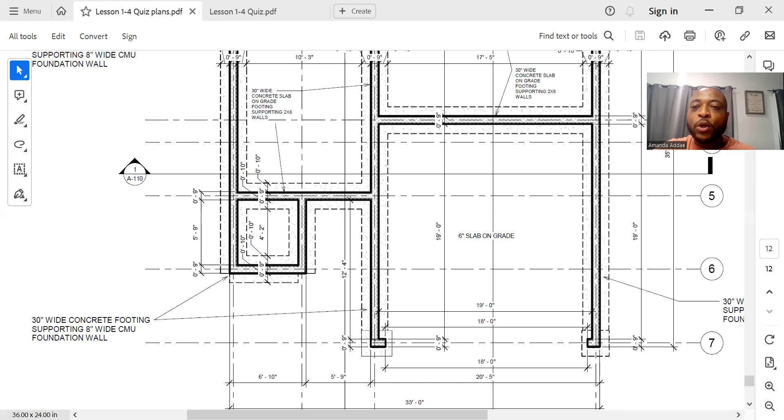All right team, here we go. This is our first quiz in the mentorship program. And I felt it was important to stop at this point just to recap, to make sure that we all understand what we've been learning so far. Not just blazing through lessons, but let's bring it back home and get some questions answered, make sure we all fully understand it before we move forward.

As y'all know, we poured the slab. Eric and Fode did come out there, so I think they got a little bit of an extra visual as to what was going on. And we were actually having to calculate some of it on the spot, on the wall, one of our walls that we were pouring, and the foundation, yeah. So I feel like y'all got a little bit of an advantage, you know what I'm saying? But either way, it still needs to work out. We all need to understand it.

And it is important because as a contractor or a GC, you're going to get to the point where you have people working for you, telling you how much concrete they need or how many truckloads they're going to order, overcharging you because you don't know. It happens. People be ordering materials and using it on other jobs, ordering concrete for your job and pouring the next job. All you get is just a bill saying, this is how much I need. But you need to know at least what to expect, so that you can kind of keep your people honest. It's good for you too, because ahead of time it helps you create a good budget, so you get an idea, okay, we need this much concrete, we know this is the rate it's going for, so we're going to try and see what it costs to do it.

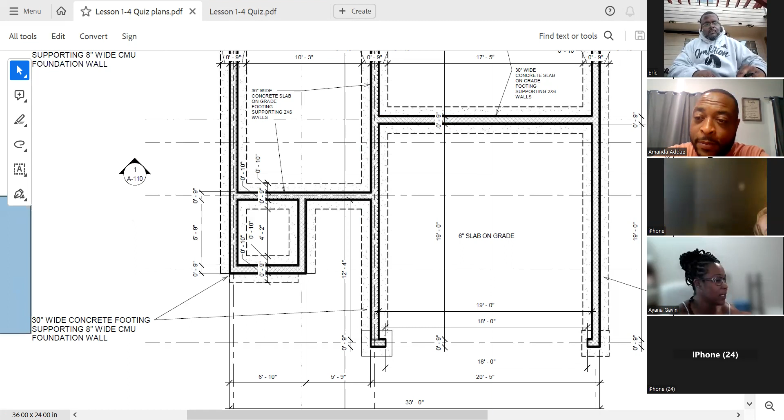So what we have here, let me get to that page. We're gonna go back to the top. So if you don't have it in front of you, understood, if you didn't print it, it's fine. Let's go over it. We'll move this to the side, narrow this out. All right, so we started out with the quiz. Let me get this off of here. And the quiz was based on this, right? I put together some pages, I eliminated some things and I just did 12 pages to kind of get to the point of what we need. So we're gonna get it started.

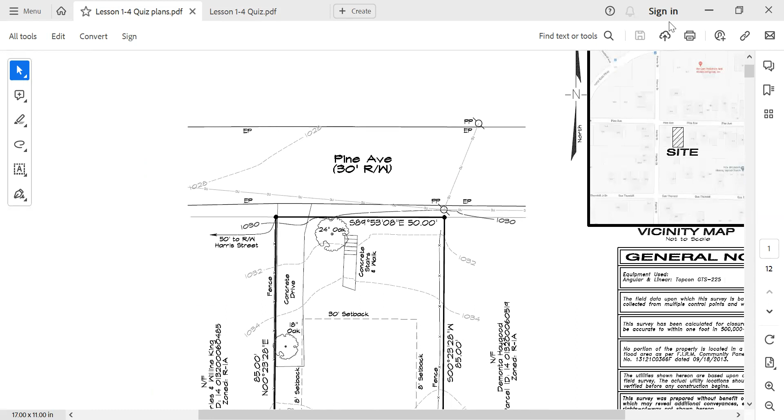The first question was, what is the street elevation? Now, before you answer that, let me get to that page right here. Okay, so we're gonna discuss this. What is the street, what's the number for the street elevation? And I'm gonna start out with the person who came to class late, Ayana. What's the street elevation? It's 1028. It is. It's also 1030.

But don't the 1030 kind of run into the property? Yeah, actually both answers are still correct, because at 1028, going halfway through, it branches. It's like between 1028 and 1030, because the street is sloping down. You got 1030 at the corner right here, and 1030 running through right here. So by the front of the property, you're at 1030. On the street level, you're at 1030, but then you're around 1028 right over here. So 1028, 1030 - if you put that you were 1030, 1028, that is it.

Both answers are correct, that is the street level. This is the street and this is the street. I will lean closer to 1030 as a number to work with. Both are correct, I actually know that both of them are correct when I did that. So that means, basically when we're doing it, we want to base it off of the 1030, the elevation that's closest to the property line. Yeah, I will go that way because that's actually where your sidewalk is, so we'll go closer to the property line.

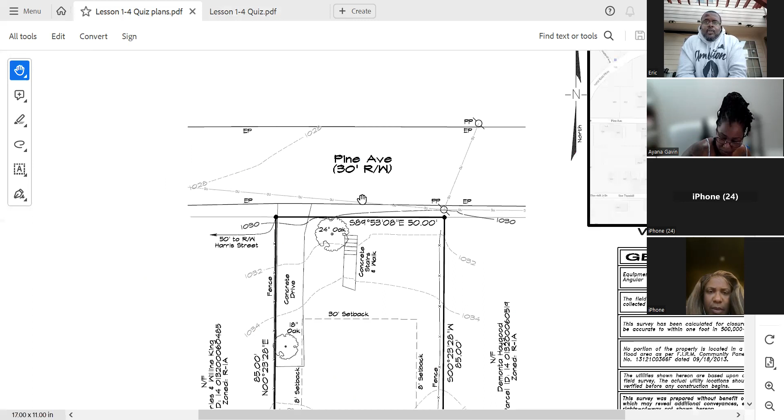So I think that was fairly simple. The second one, what is the rear elevation? That also has two answers. The rear, Eric, what'd you get? The rear has three. Well, actually, let me see. Yeah, it has three. The rear elevation, I got 1037.8, and a 1037.4, and a 1037.2.

Okay, what's the one by the tree? The tree is at 1037.2. Yeah, so we got two different levels, and then in the middle you got the 1037.4. That's not the property line? No, right here, down, the 1037.4 - it's outside of our property, but we could still use it. It just shows the different elevations of the land in the back.

Exactly. So what's the rule of thumb when you're looking at the rear elevation? Well, you want to look at your property first, where your property ends, what the line looks like, you want that. It's also very important to know what's behind you, because this is going to tell us what the difference is here. Like from here to here is not a whole lot, 0.8 and 0.4 is not a big drop. But if this was like 1050, you know what I'm saying, then we're like, okay, we got a nice steep hill or a steep incline behind our property line.

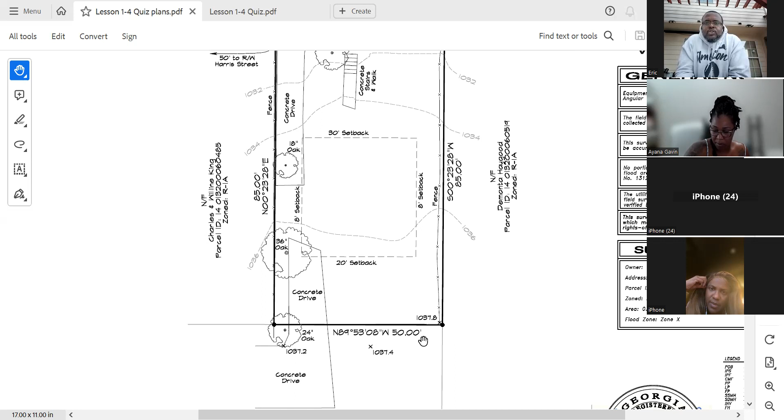Well, it would show you what way water would flow. It will show you which way water will flow. Your site plan actually also discusses that too. But at least, Ayana, what did you get for your rear elevation?

I was thinking what Eric was thinking, because I saw the 3 numbers. That's why I was asking, like, what's the rule of thumb here. I guess that would just let you know if there's a slope or a drop off behind your land.

What did you get? I had got 1036. I was thinking that it stopped around the setback, but now I see that it is 1037. So you had a stopping right about here. I see how you could do that, but definitely we always want to look at what's back here. We want to see what the elevation is at the rear of the property.

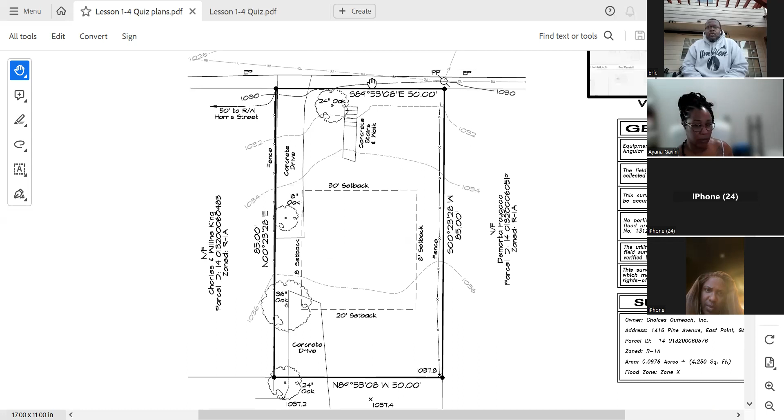Now, given what we're talking about, based on this, I think I asked the question: if you're standing at the street and you're looking at the property, which way is it leaning? Is it higher or lower towards the rear? Eric, what did you say? It's higher at the back? Ayana, you're nodding your head, you agree? Yeah.

Elisa, do you agree? I do agree, because it's 1030 in the front and it's 1037 in the back. So that's a height of 7 in the back. That was gonna be my next question. So you got about a good 6-7 feet. You know what I'm saying? Of a drop.

The interesting thing I'm going to share with y'all about this lot that y'all didn't know, the house plan is a basement house plan. But being that it's sloping, remember I taught you that when a property is leaning, when it's going down, that we can create a basement out of it, remember?

Well, in this particular case, it's going up towards the back. And we use that opportunity to create, it's not a true basement, but like a so-called basement. So basically just 3 levels.

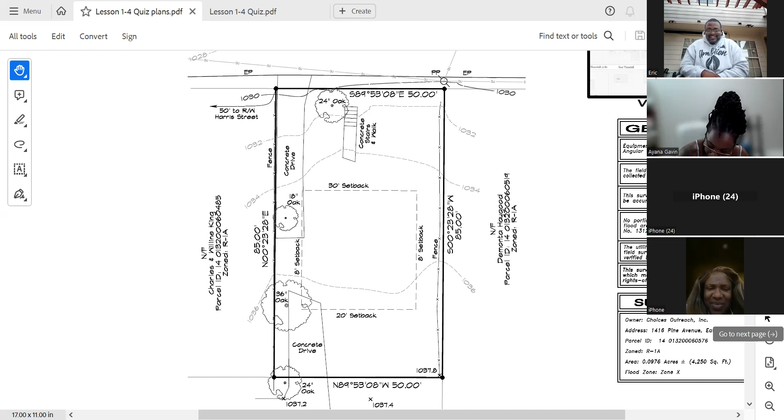Would they call that the reverse basement? Remember somebody said that? A reverse basement? That was a little different. They wanted like a piece on the top. Yeah, I remember that though. Reverse basement, like get out of here. But that's an attic for sure. A reverse basement is an attic.

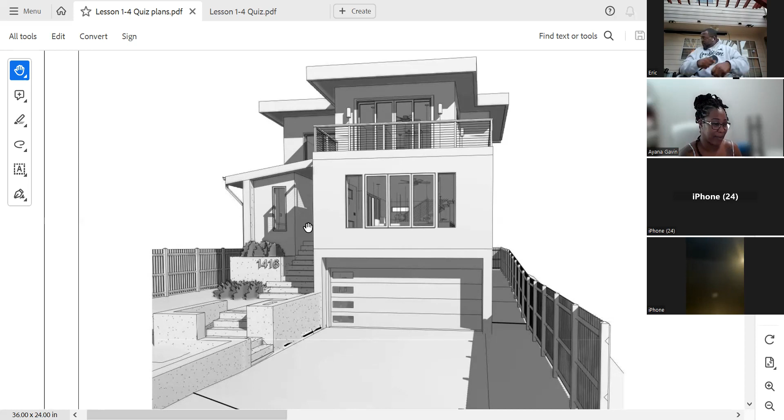So is there another room in there? There is. Yeah, and you'll see it when we go into the floor plan. So basically, we created a so-called basement out of an inclining lot. You know what I'm saying?

For tax purposes, is it listed as a basement or is it still listed as living space? It's living space because it's not fully below grade. Everything on this side, where we cut into the right, is all exposed. And you have windows on the left side around ground level. So it is exposed and it's not a full basement. So it is heated space, considered a part of the house, as opposed to where they'll go in there and try to discount the basement. Correct. That's exactly what I wanted to know.

All right, cool. So that works. That's excellent. So far, so good. Everybody get a check. All right, cool. Now let's get busy. We're through with the first part on the elevations. And then I wanted to get to the setback. So I asked a question: what is the front setback?

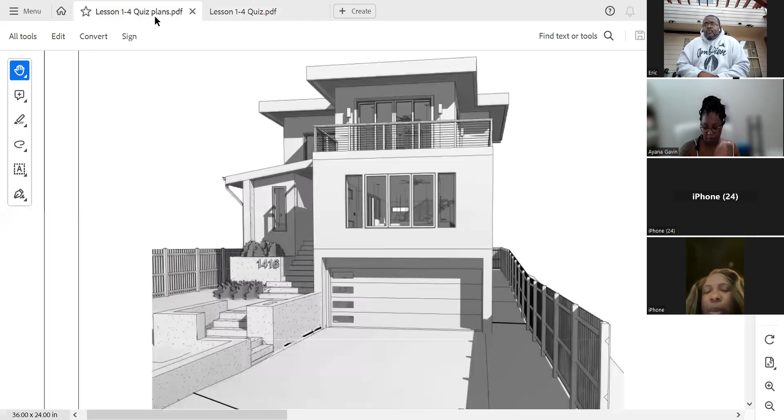30 feet. You sure about that? 30 feet. I'm sure about it, 30 feet. It says 30 feet. All right, let me ask everybody else.

Eric, what you got for the front setback? Wait, hold up, was I supposed to be looking at this on another document that I missed? No, it's on this same document. Yeah, it's 30. Wait, you didn't see it?

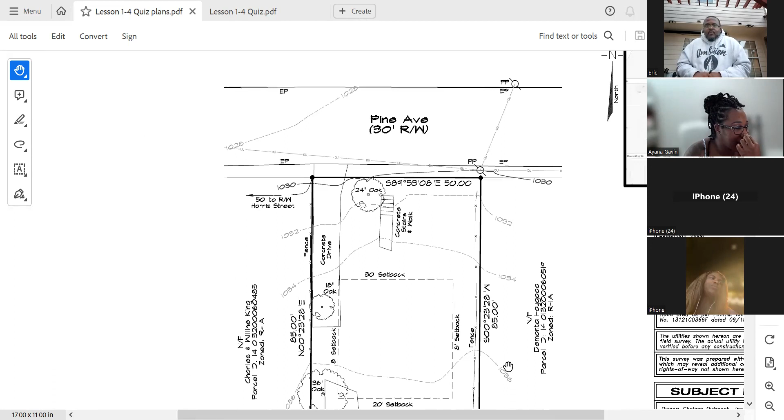And Lisa just said it, she said it says it right there. I was staying present with the present question, I didn't skip ahead. Oh, okay. Cool, so setback, everybody agrees 30.

Yeah, okay, that's unanimous, I like that, Elisa. She was like, it says 30. I should have removed the setback and just left 30. Made it. Okay, so with that said, then obviously we know what the rear setback is.

20. Yeah, 20. Yep, 20. Okay, what about the side setbacks? 8.

Question for all of y'all smart people, because I know y'all know this stuff. This happened on another house I was doing, right around the corner from it. Let's say that my house is going to end up being a little bit wider, and that means I'm going to encroach on this 8-foot setback. I need it to be maybe 6 feet or 7 feet. I can't take 8 feet because I got to put my house on here because maybe my lot is not wide enough. What do I need to do? What's that terminology, what I need to do to be able to get approval to build in this area, to maybe reduce this to like 6 feet?

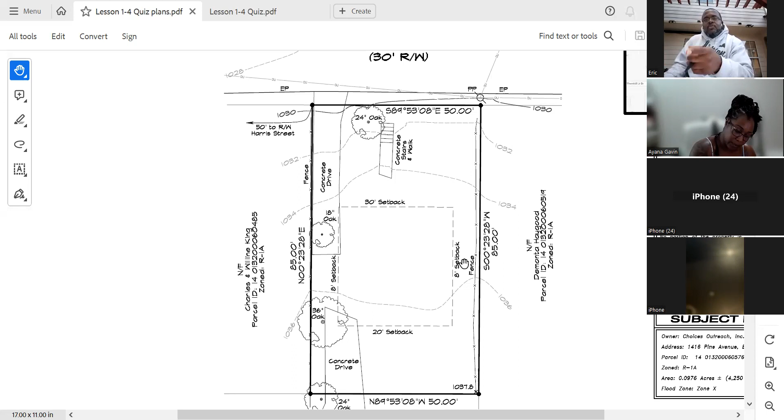That's why I didn't let you answer right away, we did talk about variance before, I just couldn't remember the terminology. We did talk about it before, and then we had to submit it to get approved before we do it, right? Exactly, because if they don't approve you, you can't do it. So you do have to resubmit, you do have to show it on your plans, show that you're asking for whatever, 7 feet, 6 feet, because the house may be wider.

You got a question? Yeah, so would it apply if you're going within the setback or only if you want to go outside of the setback? Only if you go outside of your setback. So if you're within your setback, you're all good, but whenever you go outside of that, you need to have a variance, and it may not get approved.

So there's different factors that may get it approved. In this case, I had the same situation because this same house that we're looking at, I built it on the other lot adjacent to this, and it was like the lot was smaller than this lot. So I had to change the setbacks, and they could have denied me, but it just turns out that the properties across the street were all like smaller and were grandfathered in. So when I made my case, they were like, all right, we'll give it to you, or maybe it was just God, you know what I'm saying? I got blessed for that.

But either way, maybe it was because you had owned the other property as well, so it kind of butted into it. That part.

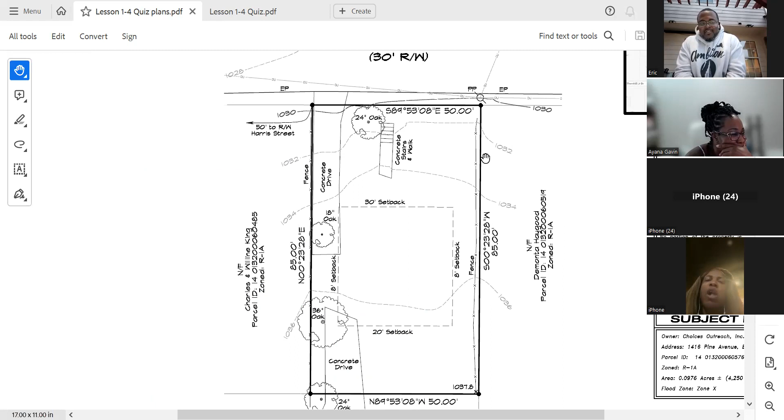Since it ain't so tricky, I'm gonna start with Elisa. How wide is our lot? Okay, let me let her eat. You're muted out, so we can't hear you. I'm sorry, my phone rang. Okay, how wide is our lot?

How wide is your lot? Your lot is, let's see, across - I'm looking for the number to show it. It's on there. 50. You say 50, all right, let me...

Oh no, let me add it up. 8 plus 30 plus 8. Is that right? 8 plus 30 plus 8. Why do you want to take me back to geometry class? Yeah, what does that give you? 8, okay, 16 plus 30. That's 46.

Is that your final answer? 8 plus 8 plus 30, that's 46. That's your final answer? Yes.

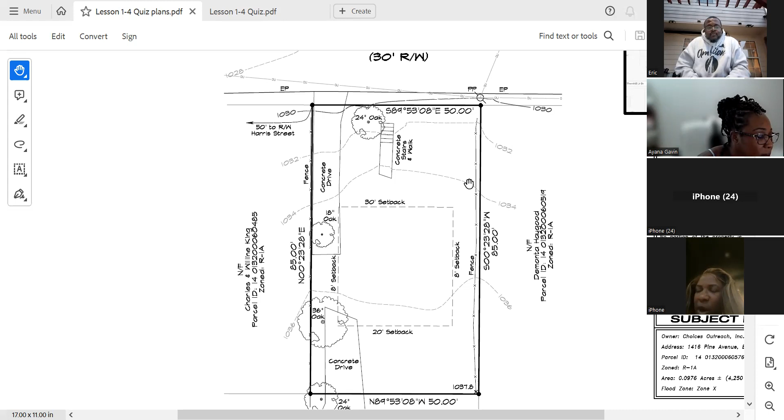Yes, okay. Ayana, what's the width size of the lot? I don't know, I think it's 50. Okay, Ayana said 50. Alicia said 46. Eric, I don't know, I got 50. You got 50 there. What do you have? I got 50, but I didn't know if you were supposed to add the 85.

All right, so that's the first part - that's how wide the lot is, right? And we're gonna discuss it. In the other plan it shows what the width is, but this one just kind of shows south - it's like the direction. Thank you. And I'm glad I sent you something different, because you have to be able to see the different ways things are written, but ultimately the answer is the same.

Elisa, I commend you on getting real slick with it and trying to come up with that number, the mathematical wizardry you try to put on us. But that didn't work, the answer is wrong. Well, I didn't know if it was the 50, because it says S89 degrees. That's the latitude or whatever.

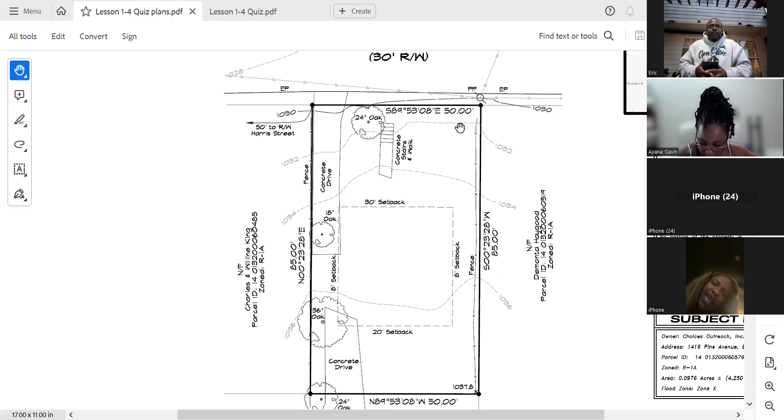Let's talk about that - it says 50 feet at the top across. Exactly, and 85 on the side. Exactly. So before, in the classes we taught, we discussed that - I said don't pay too much attention to this part, because we're talking about 89 degrees, 53 minutes, 8 seconds. That's what these are right here.

Metes and bounds - it's your metes and bounds, it's your GPS. If you want to really locate a property, you want to see what degrees it is, is it east, is it west? So over here we're running 89 degrees, 53 minutes, 8 seconds east. Disregard all that - what matters is the feet that come after. So it's 50 feet. Okay, so y'all correct, it's 50 feet, and that's what we're looking at right here.

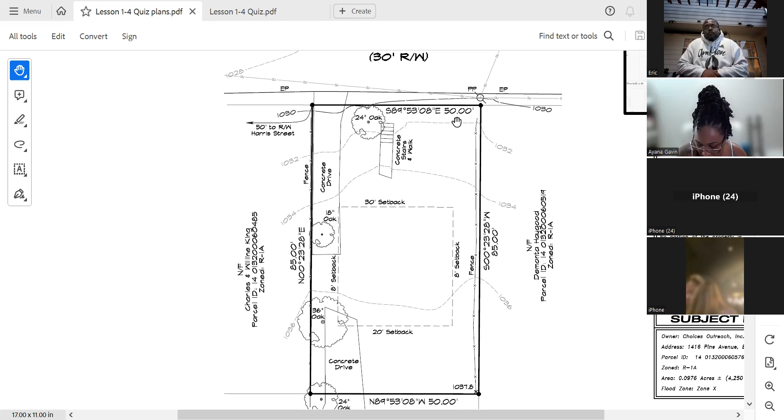With that said, then you know how long or how deep our lot is. Eric, what you got? 85. 85. Ayana, what you get? 85, because it's right there. Elisa, what you got?

85. It's right there. Fode, I know you got it. Yeah, 85. Okay, so that was it. I thought that might be a little tricky for you. Eric was like, no it's not. But see, it was a little bit, because all these confusing numbers are kind of big numbers, you know what I'm saying? So, all right.

So we know how long our lot is, we know how wide our lot is. And so I asked a question: based on the length and width of the lot, what is the maximum width and maximum length of a house that we can build? So this is our buildable area, right? This is our lot, and this is our setback: 30 feet, 20 feet, 8 feet. So it gives us this little box right here. So based on this, how wide of a house?

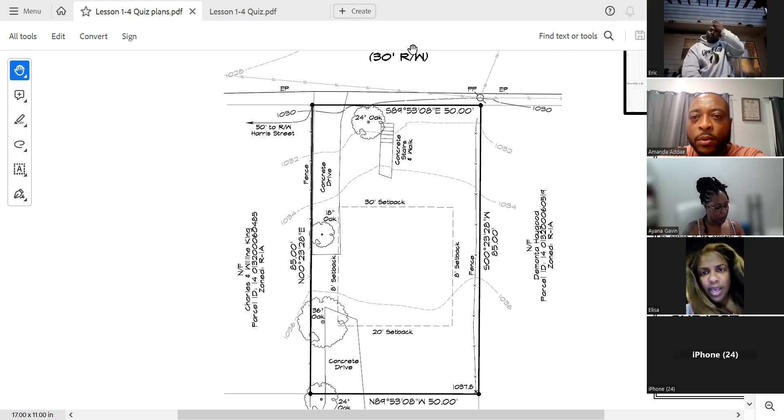So what I was asking was the next question. We know what our width is for the lot, we know what our length or how deep our lot is, we know our setbacks: 30, 20, 8. So we know this is our buildable area. We discussed this before, but this tells us one thing: when we go to look for our plans, now comes your wizardry, Elisa. When you come to this portion, how wide of a house can we put on there? And then how long or how deep of a house can we put on there? Not saying that's what we're gonna do, but what are we able to do?

I thought that might take a little bit, but I think y'all should be able to handle that, so I'm curious to get y'all answers. I'm gonna ask y'all each, and then we're gonna break down how we got it. Not sure if y'all got this far. Eric, you got this far? It's 34. Okay, Elisa says 34.

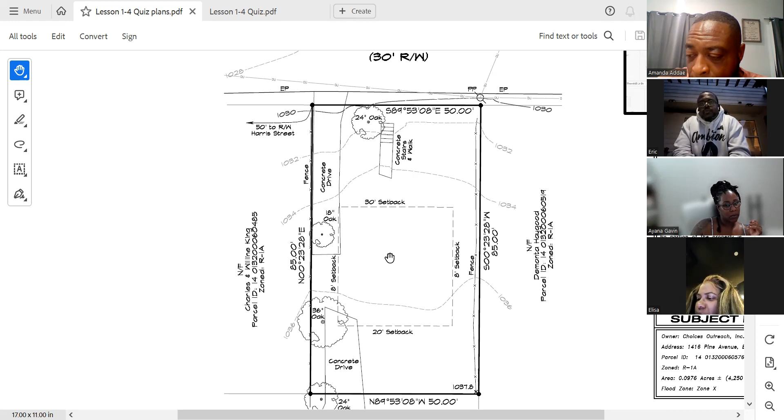Eric, what'd you say? I got 34 wide, and we're just doing the width. Okay. I had a phone call coming, I couldn't hear you. No doubt, I got 34. Okay, so both you and Elisa got 34. Fode, what'd you get? I got 34. Okay, so Ayana? I don't know, because if the front is 30 and the back is 20, I don't know where they got 34.

All right, so we're gonna break it down right now. Does anybody want to break it down how they got the 34? I can break it down: 8 plus 8 is 16, and 16 minus 50... I mean 50 minus 16.

Okay, so what? You see what happened there, right? You take the 50 and... go ahead, Eric. You take the 50 and you subtract the two setbacks on the side to get the width. You see that now? Right, there we go. Thank you.

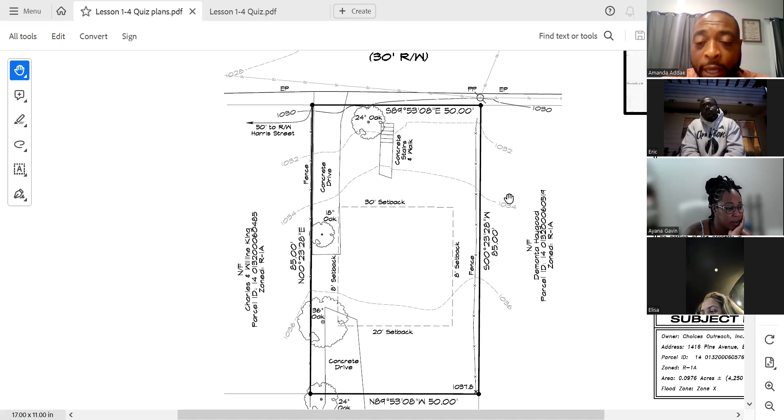So based on that logic, Ayana, I gotta ask you: how long of a house can we put, based on what Eric was just saying? If we're taking the 50, subtracting the side setbacks, going the opposite way, we're gonna take this number and subtract what? So would it be the back setback and the front? Yeah. Ooh, that's a little house. You gotta get a variance then. So what is that, like 35? Yep.

Exactly. So, in knowing this, just so y'all know, that was one of the challenges that occurred when this plan was being designed and chosen. The original plan was bigger, and it wasn't going to work. So they had to go back and redo it, and it was pretty tight. Like we were right there.

So all that makes a difference when you're going to build. You're like, oh, the lot is good enough, I should be able to put this there. After you go through your setbacks and you see what you can put there, you're realizing, yo, I can only do a 34 by 35 house, and you're restricted to that. If you want something outside of that, you got to get a variance. Okay, all right, good job, that was pretty good.

And so your house was this small? Yeah, but it's 3 levels too. So you had to build up. Exactly. If it was a ranch, it had been long — it couldn't have been a ranch. If it was a ranch, it ain't happening. College student, 2-bedroom condo, you know what I'm saying, New York apartment. Right, all right. And still costs a lot of bread. You're gonna pay.

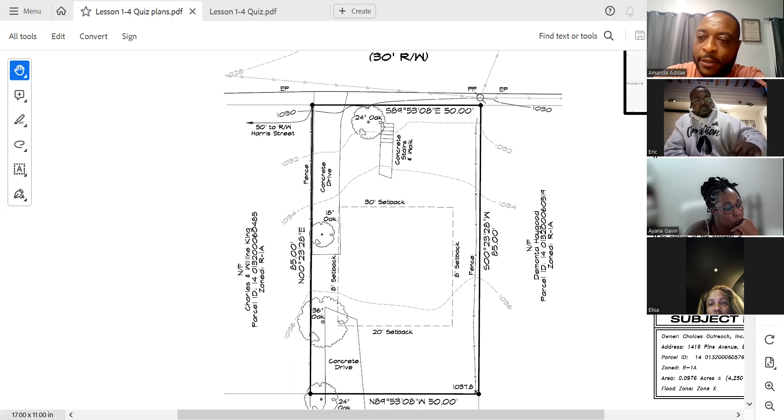All right, so then we went to the survey. I went to the next question. Went to the survey, let me see here. I kind of jumped ahead of this a little bit. But on the survey, I asked a question. On the legend, on the survey, if I use a tape measure and measure 3 inches, how many feet would that be?

Elisa, got any idea? No—I said if you use a tape measure and go 3 feet where, on the driveway? No, I said according to the legend on the map on the survey. Just based on the legend on the survey, if I used a tape measure and measured 3 inches, how many feet would that be? Where's your legend?

Oh, 1 inch is 20 feet. So 3 inches will be? Yeah, 3 inches would be 60 feet. There you go, we all agree? Yes sir, all right. So I threw that out there to see if I could trip you up a little bit.

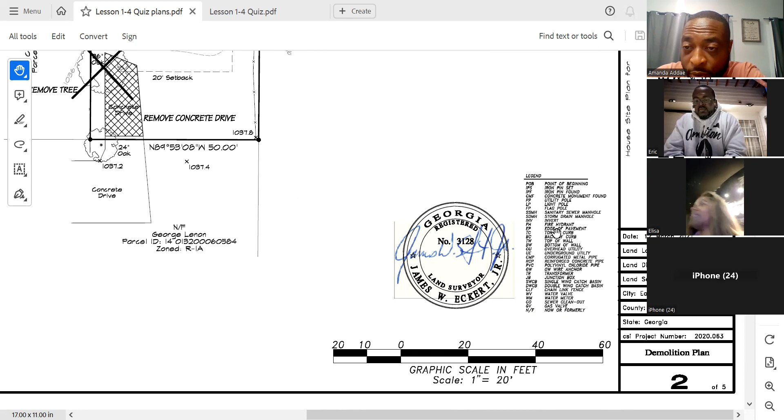Very good. Okay, now another thing, based on the legend again on the survey plan, what does SSMH mean? I'm giving you that one. Sanitary sewer manhole. Eric, I know you see that. Yep. Ayana, do you agree with that? Did I lose her? No, she gave you a thumbs up. Okay, I agree. The only person left will be Elisa, because I don't think she was looking at this.

I think she's ordering filet mignon right now and some wine. So basically she wants you to hurry up and get through it so she can enjoy, get her grub on. We know how you about to get to all that, but you can't do that while we're on here with you.

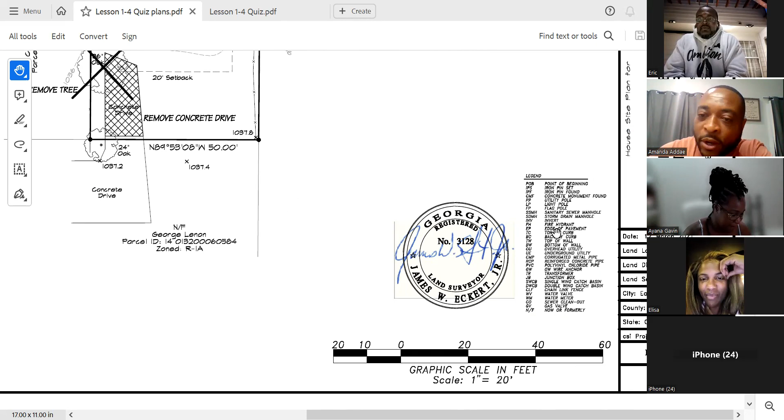So we get it. Okay, so we said that on the survey, on the legend, you saw that, right Elisa? Okay, so then I asked the trick question to see if y'all could figure that out. If SSMH means sanitary sewer manhole, then what does SMH mean?

All right, that one is not on the legend. SMH. It's not on the legend, but would it be a guess—sewer manhole? Okay, you said sewer manhole. Eric, you bring up a good point, it's not on the legend. You're right. Fode, did you come up with anything for that?

No. All right, Elisa, can you take a stab at it? No, because I'd be making something up. The only thing I can think is manhole, monuments, metal. All of y'all are right—actually the answer is 'shaking my head.' Y'all be thinking too hard. Yeah, so if it's not on the legend, it doesn't exist. That's a great point, great observation by all of y'all.

I like it, all right. And I mentioned also, what did you notice that's existing on the survey? We kind of touched on some of that. This is exactly what it was—this was the exact survey we received. So we all got this survey of this lot we're about to build on. What are we noticing here?

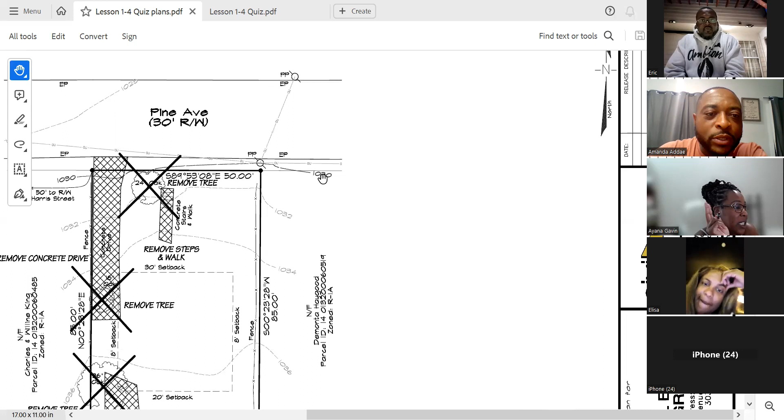Remove 3 trees—trees and concrete. We see trees, we see concrete. There's 2... why is it 2? I just see the survey of the raw, unconstructed land. So on the original lot, a house used to be there, and that house was torn down.

So when we got to the lot, all that was there was this. We have the concrete walk, which all of y'all said there's concrete there. We have the trees that were there, and the driveway that was existing from before. There was some concrete at the rear also. So y'all kept the concrete in the front? No, we took everything out.

Yeah, we took everything out. The reason there was this here is because the lot at the back, which I'm building on, was nothing but a concrete slab that kind of veered into here. So that slab was like on this property.

So without even being there to see it, once you saw this, you realize we're dealing with a lot that has these things on it. So that's going to factor into our cost now, because when we go to do this work, we're going to have to tear this stuff out, since it's clearly in our buildable area, right here on this section. But when you see the building plan as to what we're going to do, you can see that our driveway is going to be in a different location, just based on the plans I showed you earlier.

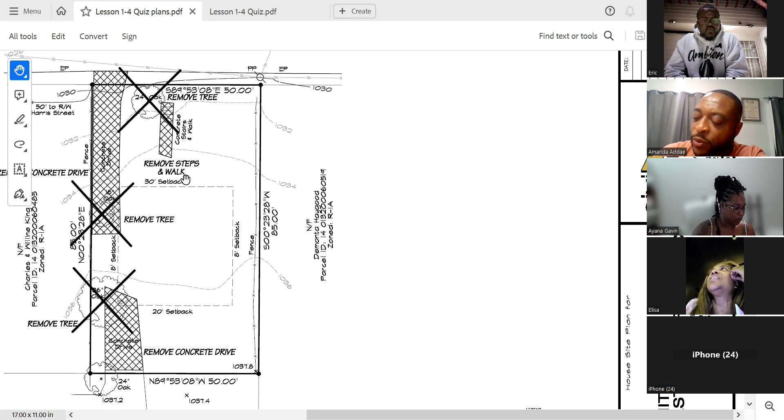Now the quick question I had is, what is the main difference between a survey and a site plan? The construction entrance.

Okay, that's one thing we can talk about. Fode, what do you think the difference between a site plan and a survey is? I say the site plan is done by an architect, and the survey is done by an engineer. Okay, so both are done by an engineer, but it shows you the layout of the house though.

Which one, the survey or the site plan? No, she's asking which one shows the layout of the house you want to build. The site plan shows you the layout of the house, the architectural layout. Okay, so this will be the survey, right? Yeah, this will be the site plan.

So I was asking for one main thing that differentiates the site plan and the survey. Eric, you mentioned that it shows the construction entrance, like our driveways and things like that. Fode, you said it's done by an engineer. So both have to be done by an engineer because they have to be stamped, since that engineer is putting their license on the line to say this is correct. They're certifying this.

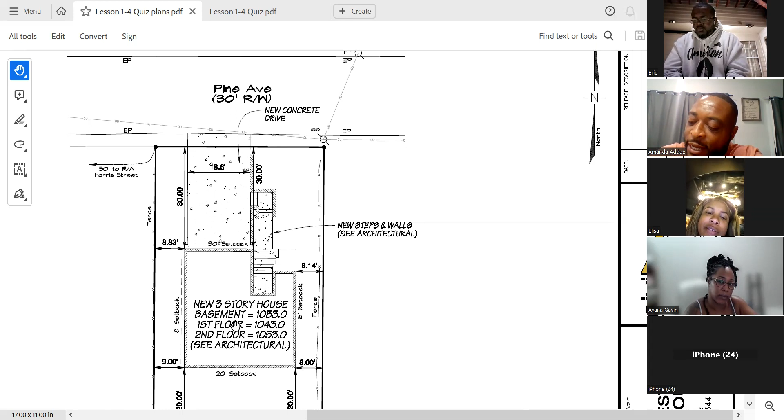Since we know what page the site plan starts on, I had a question about the silt fence. I said, how deep does the silt fence need to be below the ground level? My thing was kind of blurry, but I think you said 5 inches. You got what? Say 5 inches. 6 inches, but 8 inches to be safe, yeah.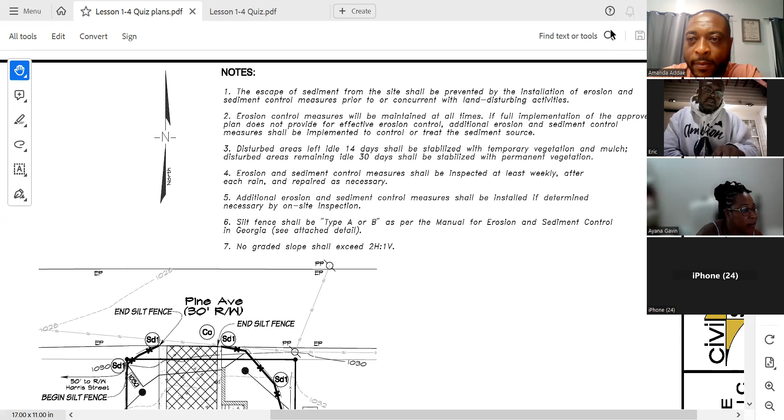Okay, yeah, but it shows you on here—it says, I believe that's a 5. So nah, it says max 6 and then 5. You see this right here? Silt fence type A and B, see right here? Yeah, you see that? That's our 6 inches. All right, okay, I was on the wrong page then. I was on the detail page 5. Let's go to page—yeah, this is page 5. This is the detail page for the silt fence.

Okay, what's the front view? You see down on the bottom? Go down, scroll down, scroll down. I got that number right there—it says 5. Which one? This? Yeah, it says 5, right? No, that's a 6. It's a 6. That's a 6. Mm-hmm. Okay, it looked like a 5.

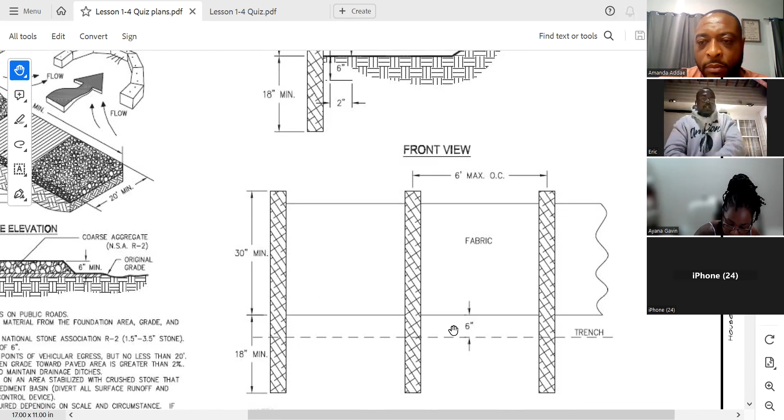And for the record too, so we know, the code is it has to be minimum 6 inches for the silt fence, and it has to be buried in the ground. And then both sides you have to push dirt, so you got to dig the trench on top of it—you got to dig the trench at least 6 inches minimum. And there's some inspectors who are going to inspect that. We had that done at Lake Vista Circle—the inspector came out and actually measured it. So there were some areas that the guys that did the silt fence, I think they had hit rock or something, but they didn't go as deep. So it makes sense, you need to bury it like that because when all the rain came, some of the silt got up under there and came out. So that's when the inspector had a problem, and then we have to go fix it. So really, if you do dig it, if you could get 8 inches, great, but if you can get 6, bury it well and then cover it back up, then you're pretty stable, so that when the rain comes and more silt comes, you're protected. All right, so that's where it's at.

Cool, we got that cleared up. And then, here's a question that wasn't on here—sort of. I mentioned, how do we prepare our construction exit? What materials do we use? Do y'all know? Crushed rock. Okay, so we got 1.5 to 3.5 inch stones.

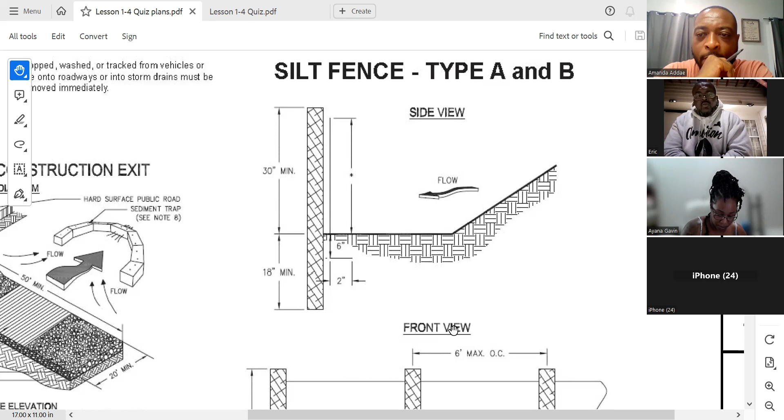NSA R2. So what goes down first? Let's say we got raw dirt. And then we're coming to put our construction exit in. So on our raw dirt, what's the first thing that's gonna go on top of the dirt?

Hold on one second, let me see here. Elisa, are you in position to answer that question? What goes on top of the raw dirt for our construction exit, on our lot, when we're preparing that lot for the construction exit?

I'll call it my construction entrance. We have the raw dirt. You have to put a border line to build on the land, you have to put that six foot... the gravel? No, before the gravel, the plastic liner.

Are we all on one big... Yes, so Eric, you said it, the plastic liner, right? You put the plastic liner on the whole lot? No, you put it under it, on the grade level, and then you put the rock on top.

So we have our construction exit, we had it on our videos too. So let's say we come to the lot, we're about to get started. We have to create a construction exit, and in order to do that, we have the raw dirt. Let's say we graded the land, so all we have is just the raw dirt now.

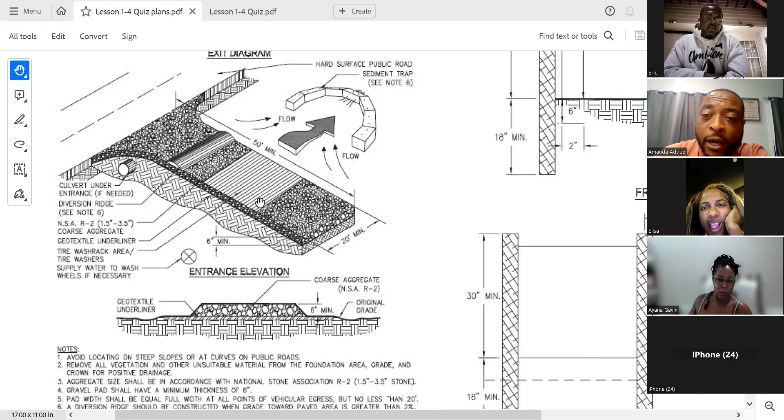So okay Eric, you got that? Fode, you got that too? Ayana, you good? Yeah, and I think Elisa is good too, since she was asking, you're good on that, that the fabric goes over the dirt and the rock goes on top of it. All right, cool. Is that the whole buildable area you do that for? No, that's just for the entrance and exit. Yeah, so you don't track all that mud into the street because you can get fined for that.

All right, we're on the next to last page. Building plan, let's make it easy. So on the building plan, where we go, I asked a simple question on that. Here's the house, here's the house. And then on our building plan, let me go here.

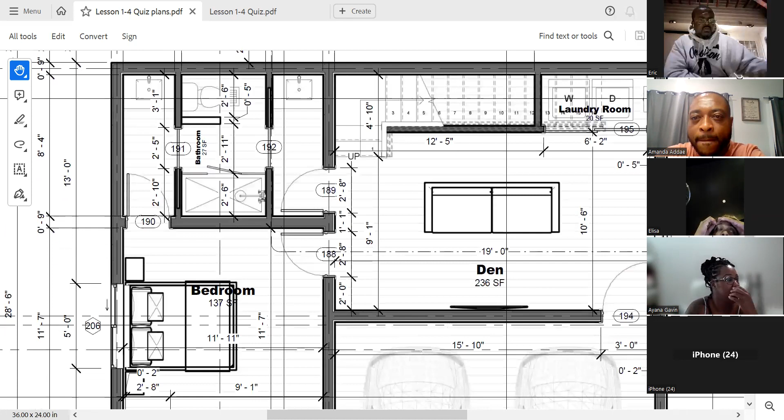Ayana, quick point for you. You were asking that question about, is it just a garage there? If you look at this, it's not just a garage. We dug out the garage area, right? We came in, we dug out the garage area. We dug out behind it, that's a den. And we dug out this area, which is a bedroom, and then the bathroom behind it. So all that was dug out.

Oh, and you put the wash machine, the laundry room down there too. Yep, all that's here, then the step takes you up. So we got windows here. This is the existing level, and everything from this point on throughout, we dug it all out and hauled the dirt out.

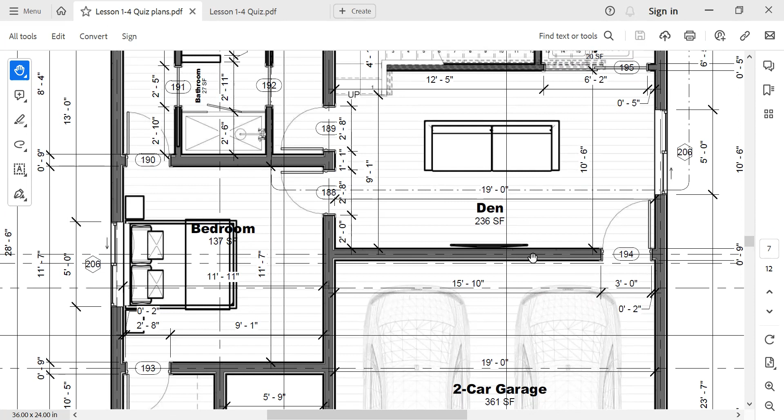Is there another exit besides the garage? There is, it's right here. So there's an exit right here, there's a window and then there's a door as well. It doesn't show you here, but there is. This just shows like a window, but there's a door actually right here, and then there's one window here.

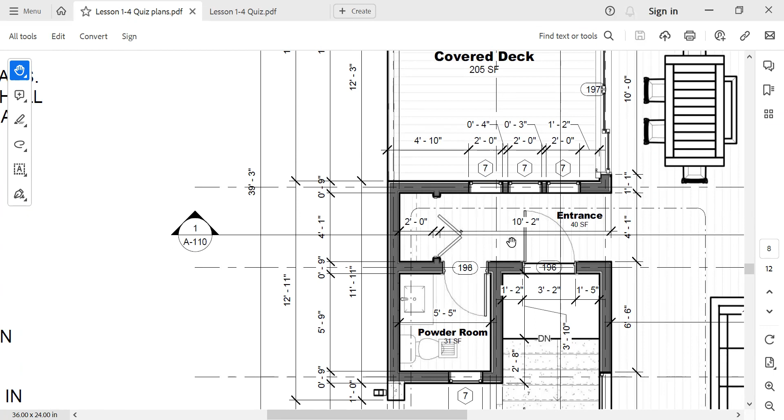So the question I asked, see if we can get that, and y'all should get this easily. I said in the powder room, right here on the first floor in the powder room, is that a right hand or a left hand door? Right here. Now Fode, I'm gonna ask you first. Is that a right hand or a left hand door? I think it's a right hand. Okay, Fode says right hand.

Elisa, what do you say? Left. Elisa says left hand. Eric, what'd you say? I got left hand. You got left hand. Hmm. Ayana, what you got? I don't know my left from my right. Okay.

All right, friend. Yeah, okay, so well, let's see.

I'm gonna ask the two people who got it right, Eric and Elisa. Elisa, can you tell us what makes it a left-hand door? Where the doorknob is and where the door swings. And it's a left hand, and it swings which way? Left. It swings left, inside. Thank you.

Okay, so when it goes inside, is that always going to be considered left? It depends which direction it's swinging. Oh, so just imagine if the doorknob is there. If it was on the opposite side, the door would swing open. It would hit the sink though. Right.

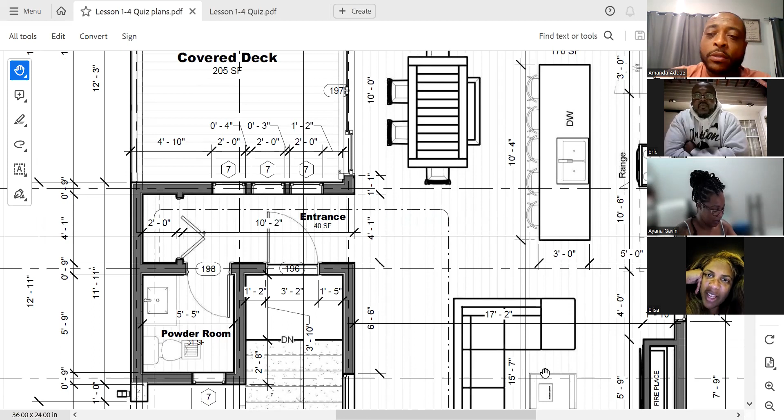Yeah, but also another way to tell is walking in the entrance. If you're facing the door, which way the door is pointed. And the one you naturally would use, which arm would you naturally use to open the door? It would be your left hand. Right, so when you're looking at this plan, Fode, you're getting that? Yeah, you were looking at it from the other way, huh?

I was looking like I was standing in front of it, and then I see it's the left hand. Okay, so remember this always, and I always try to bring this in when we talked about it before. Your doors, and Ayana, you asked the question, does a door always swing inward?

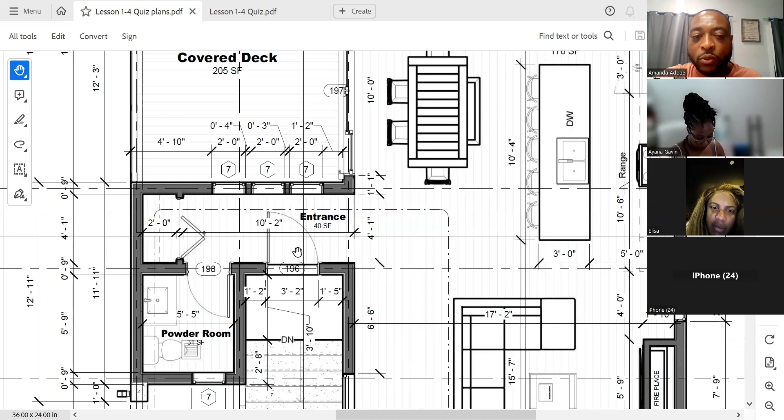And I said, in some special cases, you could make a door swing out. But for the most part, anytime you look at your diagram, it's going to be from an in-swing perspective. When you look at the doors and they have a left hand or right hand, it's always in-swing. So like this front door right here, if you're standing in front of the door, it's swinging this way. So this will also be a left hand.

So as Elisa was saying, you stand in front of the door. You have a right-hand example in the garage. Right, if I go to that, then you'll see. So look at this here.

And it's easy to confuse. I can see what you're coming from too, Fode, but the whole thing is, I wouldn't even approach it like I'm coming from the hallway. I'm going to approach it from which direction it's swinging. So whenever you look at the plan, just go look at the door and say, okay, it's swinging this way, because it shows you the loop of which way it's going, swinging this way.

So as Elisa was saying, stand in front of the door, position yourself in front of the door, and then your left hand is going to be the closest to this door. And then you're going to open it and swing it in. So this is considered left hand in-swing.

So if you don't have a plan like this and you're walking through the house making a list of doors, you have to consider that you're going to stand in front of the door, see that it's going to swing inside, and then determine if it's going to be left or right hand in-swing. We had to do that sometimes. We had to frame in the door, and we got to figure out whether it's going to be left hand or right hand. Another thing I didn't tell y'all, but y'all would notice when y'all go through the house after we frame: you can never let a door swing into an electrical switch.

Not so much an outlet, but a switch. Why? Well, it's against code, number one, but also two, when you open that door, you have to be able to access the switch. Imagine if the switch is, let's look at this powder room, imagine if your switch is here behind that door. When you open that door into the switch, how are you going to access it?

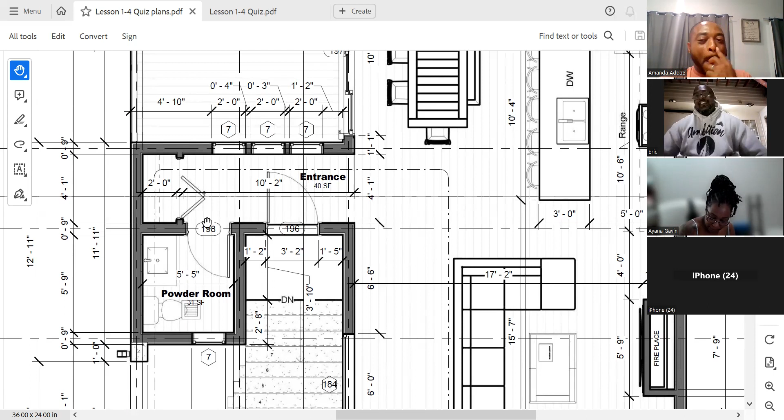Technology is going to change everything, I know. Alexa, turn on the lights. No doubt, the codes are going out the door now. We're going to throw the codes out.

So basically, when you open the door, you have to be able to reach the switch and turn on the lights. So when the electrician walks through the house with you before or after your doors are installed, they have to know which way your door is going to swing. That way they know where to put their outlets and switches. They always put the switch opposite from where the door opens into. If it's a left hand door, they put the switch on that left side. If it's a right hand, they put the switch on that side. Something to think about—it's going to come up when we go into the framing set and do electrical.

Okay, all right, so that's cool. Are you good on the swing? Yeah, all right, cool. So we're going to leave that next. Okay, so we left that swing, it is a left hand. Good job. And then I went on page 11 and I asked the question: how wide and how deep is our footing in inches?

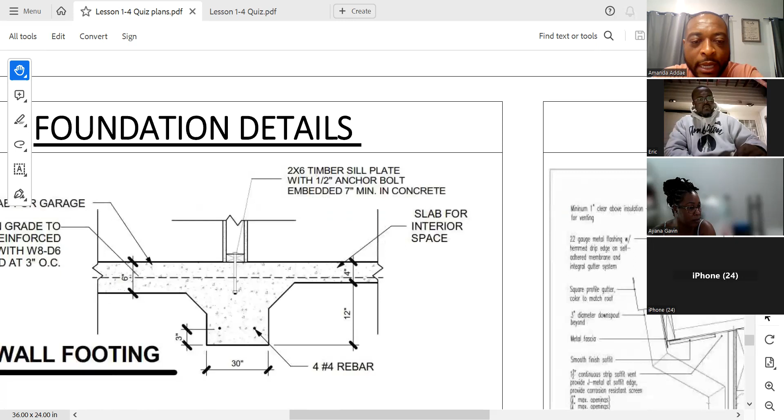Page 11. And we wanted to know—it's right here. I removed some things from this plan, I cropped some things out because this plan was crazy, it got real detailed with a lot of stuff, but I just want to keep it simple. So for the sake of what we're doing, how wide is our footings in inches? Everybody? I got 12 and 20 and 30. But how wide? 12 inches.

30, 30—you got the numbers right, but you got it reversed. The width, I got it backwards. Yeah, the width is 30 inches. Foda, did you get that? No, I gotta understand that one. Okay, how about you, Elisa? You said the width is 30? Yeah, you see that? Yeah, okay, and the height is 12 plus 4. Well, this is the slab, so we're looking at— oh, okay, 12. Okay so Foda, you see that? Yeah. So the width is 30 inches, so we all see that. And how high it is, 12 inches.

Okay, all right, so that's how it is. And then I said convert the footing inches into feet. We could do that real quick. So we got 30 inches wide, how many feet is that? 2.5. Everybody got that? Did everybody get 2.5? Yes, 2 feet 6 inches. Yep, and 6 inches is half a foot. So Foda, you got that? Yeah. Ayana, you good? Mm-hmm. All right, well what about the other one, how many feet is 12? Yeah, okay, so we're one on that.

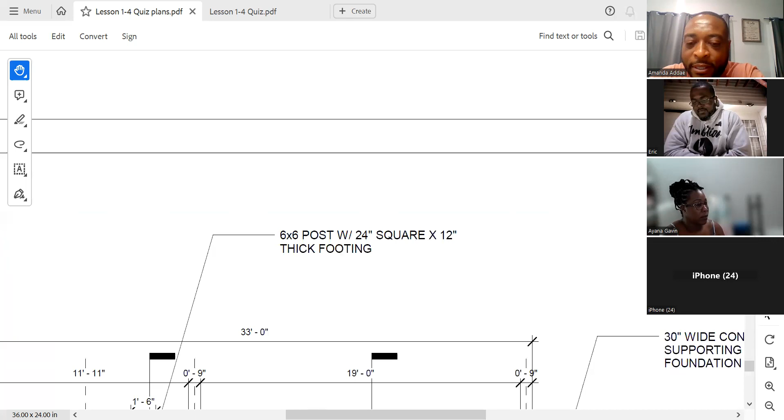Aha, trick question for you—I won't say it's a trick question, but it was on there. How wide are the grade beams in inches on page 12? Did you see how wide it was? I got 8 inches. Ooh, who got 8? That was you, Eric? Yeah, that was me. Nah, I think you might have been looking at something else.

Y'all remember what the grade beams were? Is it in them grooves, like in between the squares? Foda, how about you, what'd you get? I didn't— I couldn't find it, hold on. Is it 30? Elisa, what do you think? 9? Oh, sorry. Okay, you want to know—I want to know how wide the grade beams are in inches. The grading? The grade beams. Oh, the grading is 9 inches.

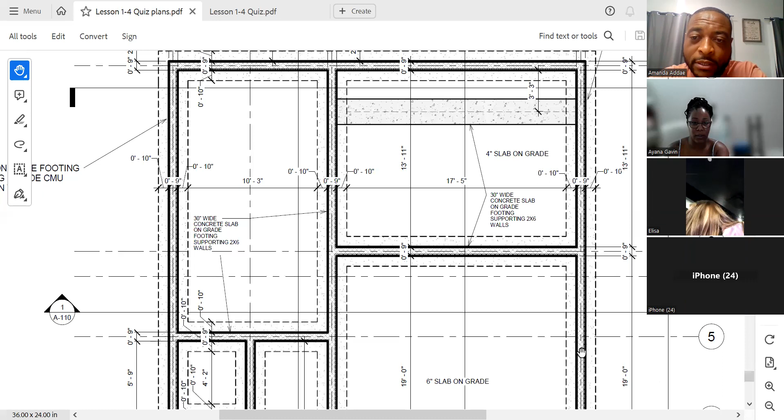Okay, so let's explain that, because I knew this was going to be a little bit confusing, and I asked that question on purpose, because y'all do realize what a grade beam is, right? I think we all went through that before. Y'all know there's the footing, the beams that connect, and then there's the grade beam—it's on the inside, between the inside lines, the inside lines, that's the grade beam. So Foda, you say you didn't quite understand that. Elisa said 9 inches, and Eric, you said 6 inches. I think you were looking at the 9 upside down. No, I said 8, but I don't know where I got that number from. You said 8, okay, so check it out.

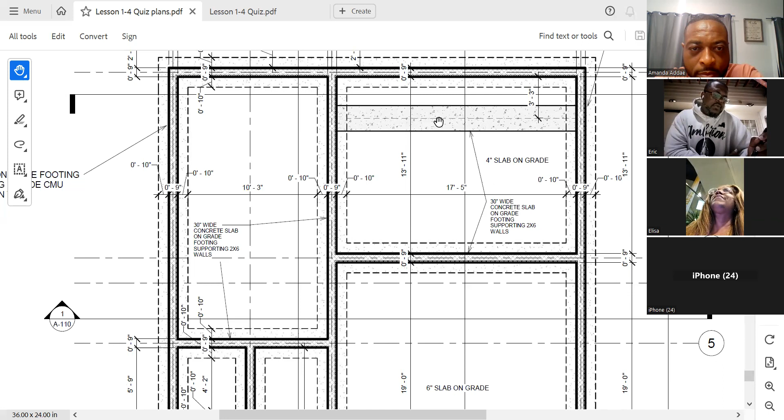On the side it says 30-inch wide concrete footing supporting 8 wide foundation wall. That's where I got the 8 from. Yeah, so the foundation wall.

But in this case, the grade beam is because this wall is what's highlighted, that's what's dark. I understand where the confusion comes in, but it's not this wall we're looking at. We're looking at the actual footing, because prior to this we discussed that the footing is 30 inches wide, and 12 inches deep. We said that, because everybody answered it correctly.

So now when we come to the grade beam, which is everything on the inside, if you look closely you'll see this 30-inch, and it tells you here too. It says 30-inch wide concrete slab on grade footing, supporting 2x6 walls. So it points to here, points to there. So this is the 30-inch wide grade beam, not the piece in the middle. The 9-inch piece in the middle, nah, it's from here to here. Y'all see the hand part? Here to here? Okay, so that's the beam, here to here.

It's supporting this. The darker piece is where your wall is going to be. The grade beam is the wider and lighter piece, which is underneath it.

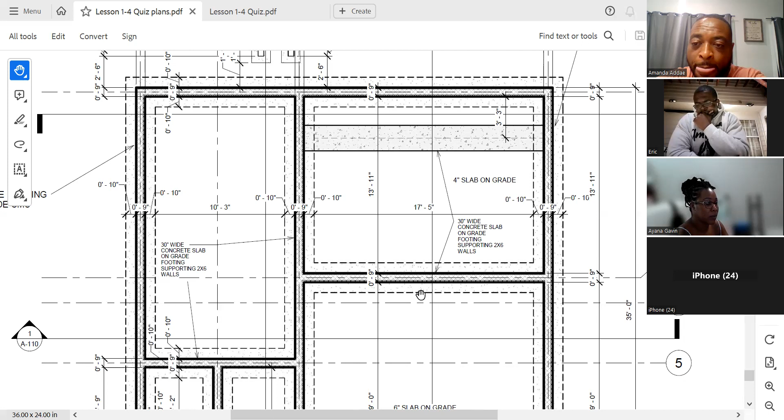width for the grade beam. It says on grade footings, all that. So your footing is 30 inches, your grade beam is also 30 inches, okay? And we had to do this or else they were going to fail us. The inspectors were really strict about this stuff.

Another thing they're strict about, which I wanted to show y'all, is I had a question about how many rebars we need in the footings. Did y'all get that? Four. Okay, that's pretty good, and I know because it says it on there.

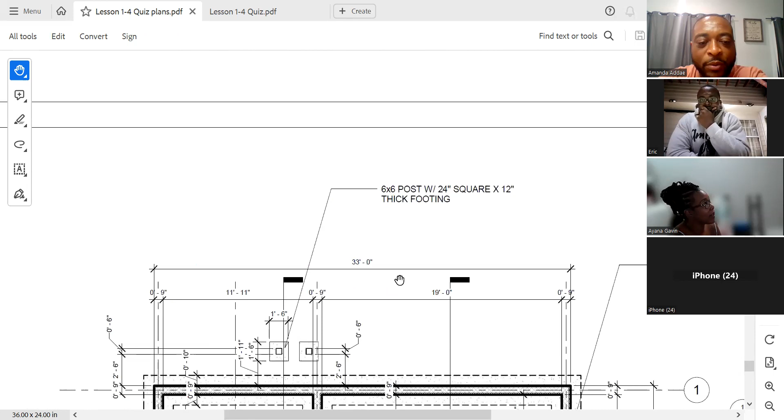You saw it on there. But that's pretty good, I'm not sure if you saw where it was at, Elisa. Because I don't think you had access to that. Ayana, I don't know if you saw it either. I didn't see it. Y'all fellas want to tell Ayana where it was? Yeah, what we looking at?

It was what, on what page? On what page is that? It's on the other page. Yeah, 11, right here, there you go. For number 4 rebar. Number 4, okay, so it's 4, number 4 rebar.

And the way they had it, they wanted 2 at the top and 2 at the bottom, so we had it extra sturdy. Wait, so where you see the 2 and 2? I see the 4, but how do you know 2 goes here versus 2 goes somewhere else? It's the arrows pointing to it on the left. You see it? And it says how they're supposed to be spaced too, well, 3 inches apart.

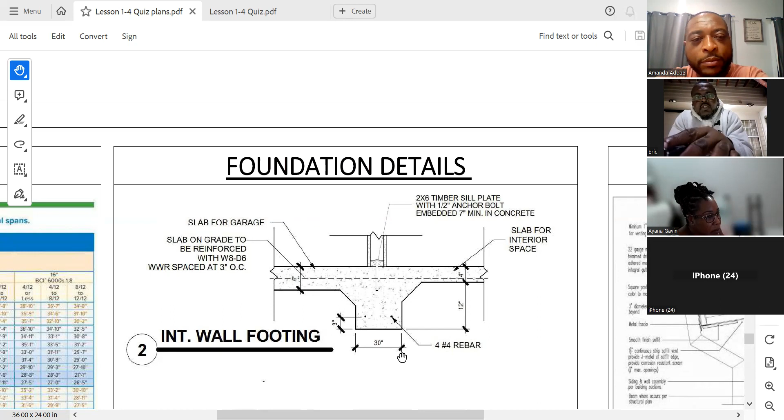I see it, but also one of the things that I did, and I think I removed it from here, because there was so much detail. So y'all did pretty good with that, but I had so much detail on this page. All this wasn't blank, it was just too much. I didn't want to confuse y'all.

But in that detail, if I exposed it, you will see where it tells you it wants 2 up top and 2 below, specifically says that. But definitely at least you know that you have to have 4, number 4 rebar.

We need that confusion, it helps us. Yeah, you're gonna get that next. It's coming, not right now, not at this point of the quiz, but we're just gonna get through the basics and recognize what we need to recognize. But yeah, you're right, we're not shying away from anything.

Next, like 3-4 months later, y'all gonna be talking directly with the experts on each particular section. So we're gonna get like crazy with it. But right now, we're starting out, so we're gonna get real detailed as we go along.

All right, so then comes the hard part, which I know some of you didn't see everything, but let's knock it out real quick together, all right? This is calculating concrete. And Elisa was like, I gotta calculate concrete.

Because I think, Eric, you was mentioning that you couldn't really read everything that was there, right? Yeah, you say you really couldn't see your numbers too well. Yeah, you know, my sight's gone.

So what I did, I'm gonna show you how we broke it down. But any of y'all could take a stab at it though. Did anybody get how many feet total? I said, how many feet total was the footings? Did anybody get a chance to take a stab at that?

Not really? Okay, let me tell you what I did. Let me reduce this some. Now we all know our footing is our exterior, right? If we start here, this is our footing. We're not doing anything inside, we're strictly outside. This is our footing, going all the way across, coming here. This is our footing. We all agree to that?

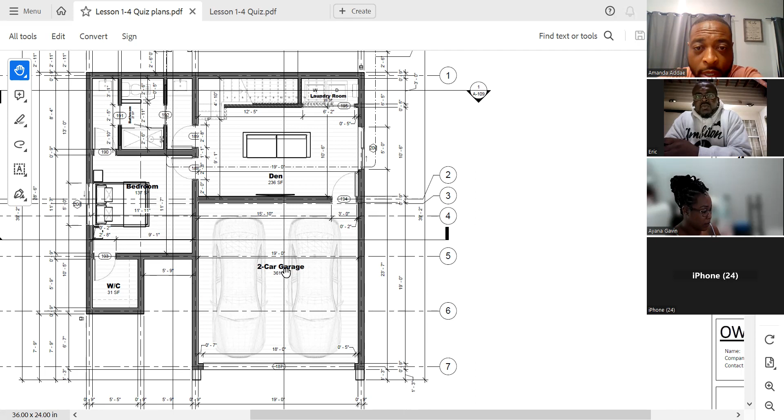Okay, yeah, so basically we did the shortest way we could do it, or the shortest way I could do it. I basically took this right here, from here to here. Well, actually, there's a better one, the basement, not this. The foundation plan gives us a better layout. That's the one we used. So let me go to the foundation layout.

Okay, that's 103. Yeah. All right, y'all see the foundation layout? Yeah. So I came here and I said, okay, let's add it up. Hope y'all got your calculators ready. Yeah, I went right from here. Now you can start anywhere you want, and I said started from here too, but you started here too?

Yeah, well, go ahead. All right, so we're gonna figure out how many feet total do we have for our footing, because we already know how wide in inches our footings are, and we converted it to feet. We know how high or how deep our footing is, we converted that to feet. So one was 2.5 feet and one was 1 foot. Now we need to figure out how long, what is the total length of footing do we have?

So I basically look at this, I go right here, I looked at this, and I went all the way up, outside. And I look at this: 35. 35, okay.

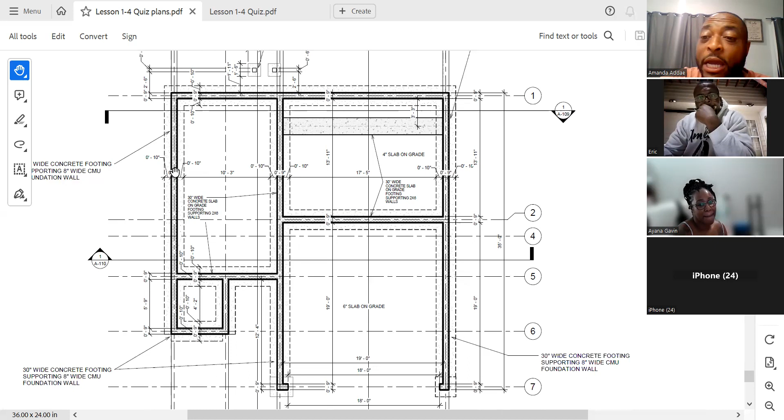Shouldn't that number be on there though? It should. But remember I said before, everything ain't always on there. In the event that something is not on there, that's why we got to go by the scale. You know what I'm saying?

That's what I was looking for, that number, and I was like, oh, if it ain't on there, now we could do one better. We could go to—I thought you would have done this, Eric, because you mentioned it, and I was like, pretty slick. So let's say it's not on here. What else can we look at that will have it on there? What do you think we could look at that will have that number?

I came up with a number by subtracting. I took this number and went through here and started breaking this down. I know what this number is, and I know what this number is. So I was like, I'm gonna add this number, come across, and break this number out. But look at this—this is where we get creative.

If we go to the actual building plan itself, we should be able to get some numbers, correct? I didn't even think about going to another page. I thought you had mentioned that.

But this has a lot of numbers. A lot of numbers. But if you go here, you have more numbers to work with. Yes, a lot, but you have more numbers to work with. You got more numbers to work with, right?

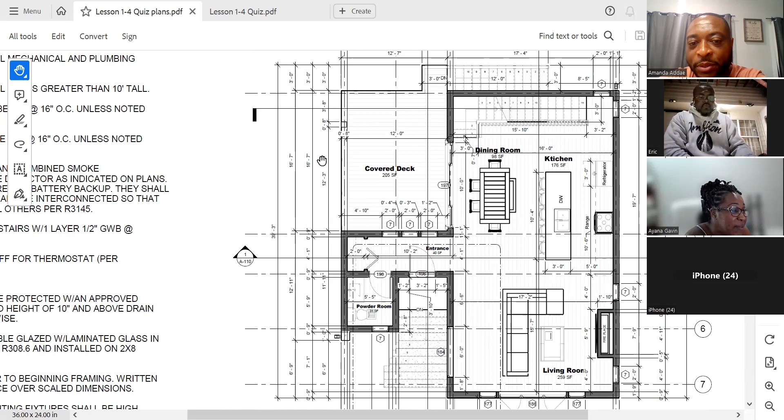Is everybody at least following? Do we have some numbers here to work with? Yeah, it's a lot. So let's figure it out together.

Because if we couldn't get it on the plan and we didn't print it to scale where we could use a ruler and say, okay, 1 inch equals this and 2 inches equals that—instead of going through all that, then what do we do? Let's get creative.

We go back to the building plan because we need to figure out this part. We already got this part—we got the long part already, right? We got 35. We got the whole back here, which is 33, right? But now we don't have this number.

So let's go here. If we go here, we see where this is marked off right here. From here, if I come all the way down to about roughly right here, it's got me at what? What's that number over there? 16 feet, 7 inches, right?

Y'all see that? You got your calculators? So we're going to call it what? We're going to round it off to the nearest foot, which is what? 17. 17.

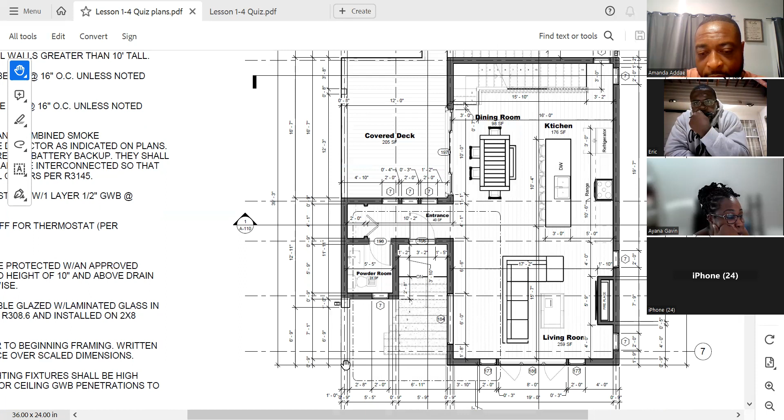Y'all see that from here to here? You said it's what? Okay, from here. Now we need to go from here to here. My brain said it's late and this math is complicated. You got 10 more minutes. Think it out, come on.

I got 7.3. Okay, so here's what we're gonna do. We're gonna say from here we got 9 inches, right? Because it shows you right here, 0 to 9 inches. We're gonna call that 1 foot to be simple. Then we got 5.5 inches. Well, we got 5 feet 5 inches.

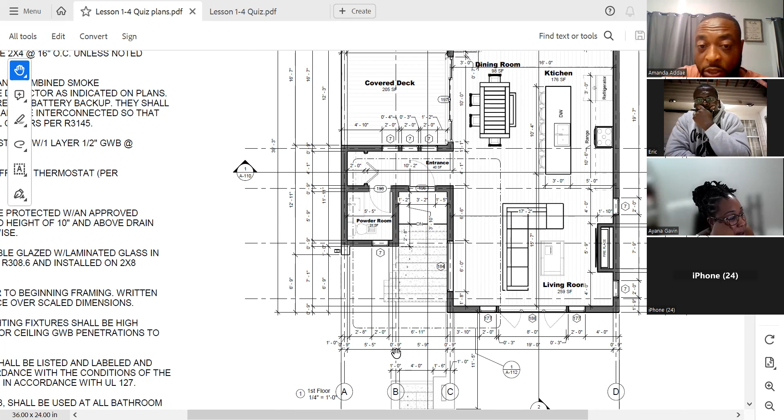Why is it broken up into those little sections as opposed to just going straight across? Because this is your construction plan, and this is actually what they wanted the wall to be. The wall is 9 inches. So you got a 9-inch wall. After your 9-inch wall, you got a 5 foot 5 inch width. And then you got another wall, 9 inches. So this is your true detail when you're building, got exactly how you're gonna frame everything out.

Okay, we're using that to try to come up with the right number. So we got 8 then. If we got 1. Yep, so we're gonna call this 5 feet 5 inches. We're gonna call it 6 feet, right? We're gonna call this 9 inches 1 foot. We're gonna call this 9 inches 1 foot. So we got 8. Okay, so we got 8.

Where'd you get the other 6? From that groove, right here, that line, the one that goes across. Yeah, but we haven't got that yet. Remember, we came here, we just came across here and got the 8. Then now we gotta go up and add the 1.

See right here? Is it not that whole wall going up? Like this whole wall here. That's 5, that's not the 6, that's the 8. Remember you said, what's this number right here? This 9 inches? Yeah, and then we got the 5 feet 5 inches.

Yeah, then we got another 9 inches. So the 9, we're calling that 1 foot. Okay, yeah, got that, that's 6 and 1. That gave us 8 all the way across. So that means from here to here is 8 feet. Okay, now we got to go up.

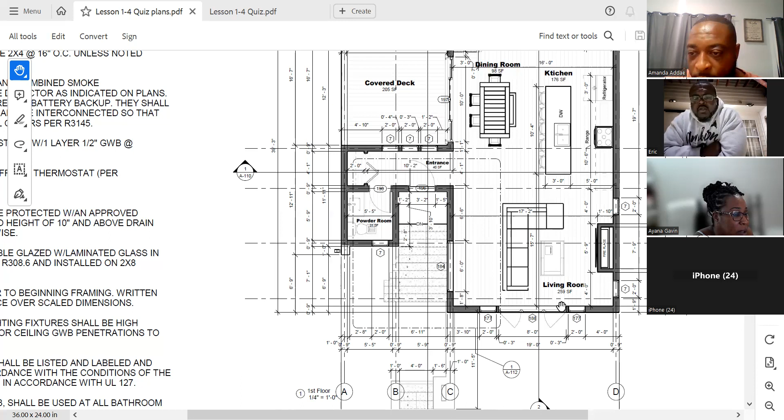Okay, hold on. Right. Okay. That's better? Yeah. That's better, or you want it? Yeah, nah, that's good, that's good. Okay, so maybe this will help.

So you already got this, you already got this part. We're good on this part. Yeah, okay, now we're gonna measure this part. So we got 6, we got 6, 7. Wow, because we got this point over here.

So going back up here to the top, you got... so we're looking for this right here, right? 5.9, and then another 9 inches. So you got 6. Y'all see where he's getting at? 7, from the top. Okay, so here's what Eric is doing. He took this whole piece, right?

Yeah, this whole piece is identical to this whole piece. So all he did was he took this wall, 9 inches, and then he went to the next line, which is 5 foot 9 inches, we'll call that 6 feet. And then he went to the next one, which is 9 inches, and he gave you 8. So we got 1 plus 6 plus 1, right? So that's another 8.

That's what you had, right, E? Now I had 7 because we added on the bottom already. We added the 9 inches on the bottom, correct? Actually, no, I have 7 feet in my notes.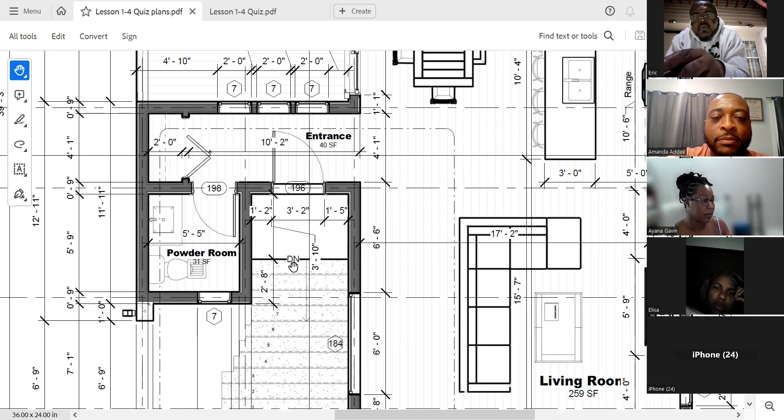Yeah, scroll down, it says 6.11, all the way down. Yeah, there you go, right there at the bottom. Which means what? 7. So we're gonna add that as 7, right? Yep, plus. Everybody got the 7? Yeah.

And then you gotta add the 0.9. We'll leave it at that because we're gonna run this one down. This is gonna cover the 0.9. Okay, so we'll leave it at the 7, plus 7. Okay, everybody good?

We're almost done, y'all, we're almost done. Almost done, now comes the last couple of parts. We just got this side and then we got this side. So let's go from here to here.

So call it 7 plus 8, right? 7 plus 6 plus 2. 15. 15 it is.

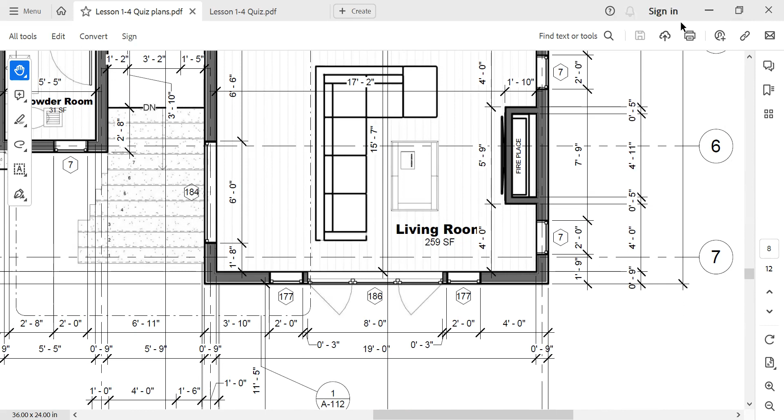And then finally, this one is simple, y'all. Y'all ready? This one is so simple, y'all should be super happy. It's almost over. 19. 19.

It really should be 20, because that was another one on the other page. So let's leave it at 19. Yeah, on the other page it said 18 and then 20. You're talking about the foundation page? Yeah, on the foundation page it had like 3 numbers on it.

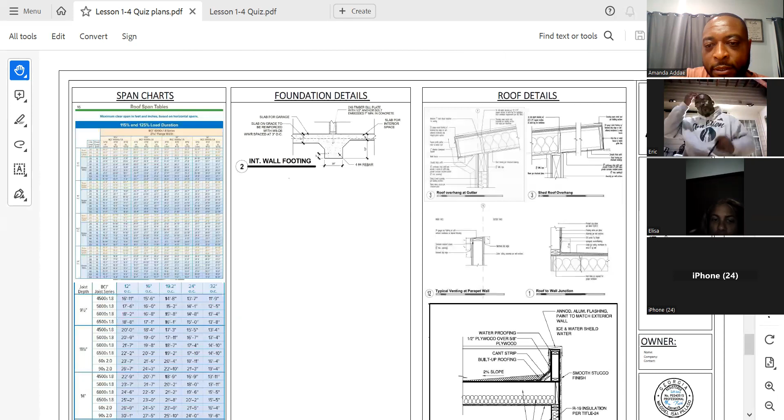Yeah, this is where it gets... all right, so that's the whole footings. We got 155.

Oh, fellas and ladies, look at the big mistake I made. The middle wall, we didn't do the walls. No, we're gonna skip the wall, but look at the mistake that I made. Did anybody catch the mistake that I just made? That I led all of us to make?

Is it on the bottom? Right here, yeah, y'all see that? I see it, but I'm not quite sure what I'm looking at. Yeah, it's not. That's the garage opening, so it's not 19.

You see that right here? It's not 19, so this is really our foundation plan. This is the number we're supposed to be using. We had all these numbers but didn't have a clear number from here to here, so we went to the building plan to figure it out.

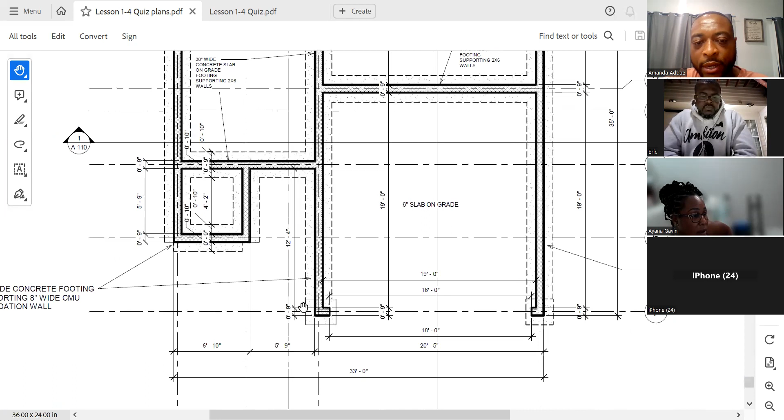But if we just figured out this number, once we figure this whole side out, we could have come back here and continued doing what we were doing. We figured everything out and added 19 right here. Eric, you were saying it was like 18 something, right? Yeah, it said a whole bunch of numbers on it - 18, 19, and 20.

So this section right here, Ayana, this part shouldn't be part of the footing. You see that? Because this is our driveway, that's open, so we don't measure the open. We gotta take the 19 away. There's no load, so there's no footing needed. This is where our garage door's going to be, so there's no load really bearing on here.

The load that is bearing on here - and if we look into further stuff, I know it's getting late so we're gonna wrap it up - it's an LVL beam resting on these footings, and the beam is carrying across all the load. It's like a triple beam going all the way across, so there's no load here.

So we're gonna remove the 19. Whoever's got their calculator, let's break it out. We got 136, I got 136 so far. So about right - anywhere between 132 to 136 will be correct. So all we'd do now is call it 136. All right, team?

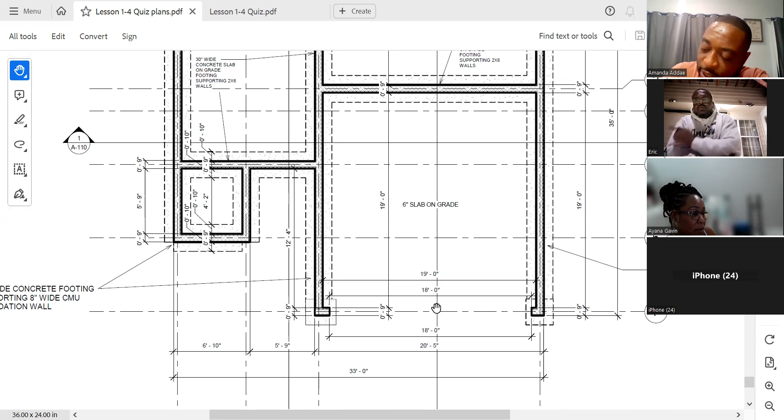All right, I know it's late. Y'all following me? We're almost there. Burley, we're about to wrap, but you're following, right? You've seen how we're getting it.

Burley, I might have to revisit this part because it's all mumbo jumbo, but I know there's no beam going across because it's an opening - that's where the garage door opens. So when we finish this and I send the recording, you can take the time and go over the section and see what it is. And if there are questions when we get back to our next live, you can bring it up and we can discuss it.

So finally, after that, how many inches? Well, I asked how many square feet is our slab. And that one, it's a cheat code we can do - all we need to do is go back to our building plan. When you look at our building plan, we know we have a basement, right?

You see that? Our basement is 638 square feet. But in addition to our basement, we've got a 2-car garage, which is 398 square feet. But it's all calculated down at the bottom - yes, so it's calculated in.

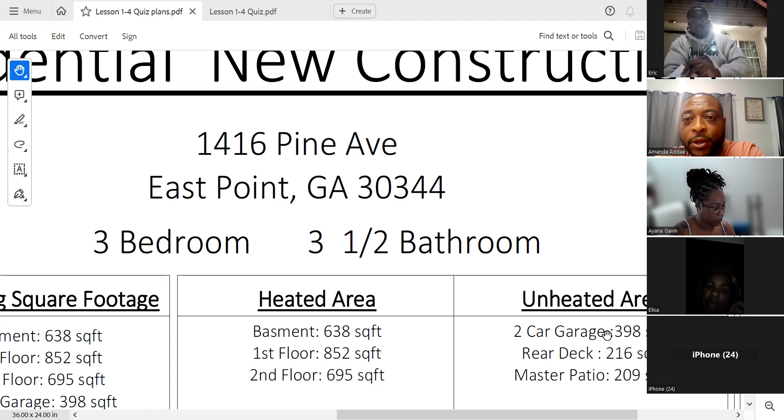So what you do is just use this. But remember, we're not doing the total calculation - we're talking about our slab. The question is, how many square feet is our slab? 1,036 square feet. Wait, say that again - some math that makes sense.

All right, yeah, let's see. Did y'all see how we did that? Yes, I did. Wait, say that again? You finally woke up because you heard we're about to finish. You're like, okay, let me break this down real quick.

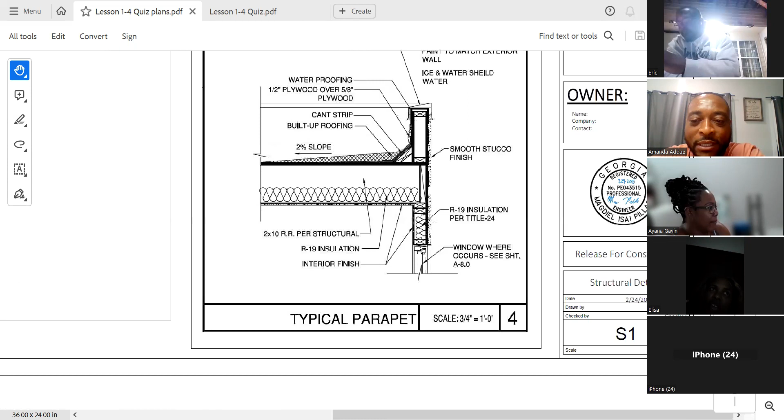So for the rest of y'all, if you didn't see it, this is what I wanted you to see. We looked at the measurement Ayana was just putting together, and here's how we came up with it for our slab. We said we have a basement, which is here, here, and here - this is our basement. And how many square feet is this? 638 square feet is what I just showed y'all on that building page.

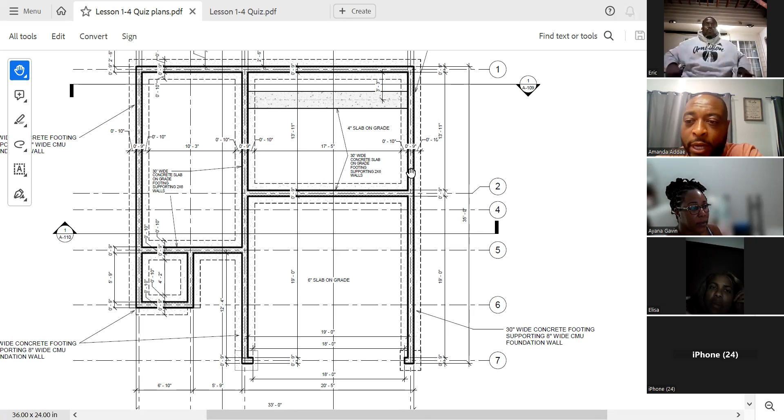Plus the garage. And then after the basement, we also have a garage, which was 398 square feet, according to what I just showed you. So all we did was take our basement square feet and add it to our garage square feet, and that gave us our whole slab square feet. So y'all got that? Got it. So it's 1036. Everybody good, right? Yeah, we got 1036.

Now, based on that, the only thing we need to know is how many inches is our slab. Now that's another one too - Elisa said that last time, because when we were looking at the footings we were talking about how many inches wide and how deep. Remember, you have two different slabs - you've got a slab for the garage and a slab for the house. Well, it's gonna be the same width - it says 4 on one and 6 on the other. It's gonna be 4, based on what we looked at.

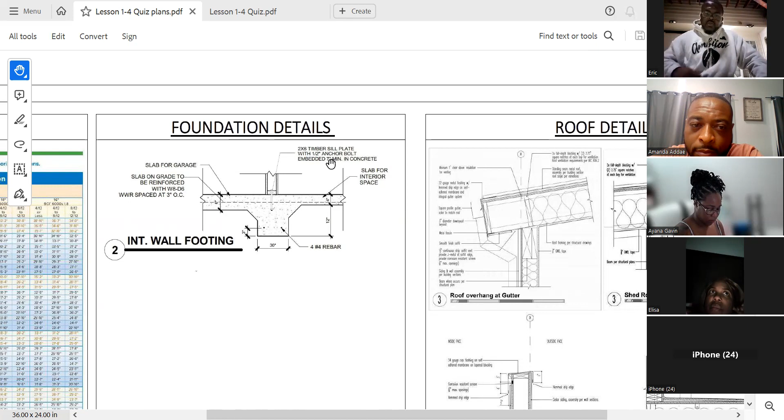So if you go to the detail we're using, we're not talking about this part, we're talking about this on the foundation plan page. The foundation detail, the foundation page, the S103. Hold on, what page you got on that? I don't know what page it is, I was just going based on this right here.

But we'll go to the foundation plan real quick. Almost there, y'all, hang in there. Okay, foundation plan, here we go. See, this is on the garage, it says 6, but on the house it says 4.

Yeah, we're gonna do 4, so we're gonna go based on 4. The garage did say 6-inch slab on grade on the garage. You're absolutely right, but we're gonna go with 4. However, if we're gonna break it down per the slab, in fact let's break it down per the slab, the whole slab is 4.

What was your point, what'd you say? Oh, I thought I heard something. My bad, okay, no problem.

So Eric, you're absolutely right, it does say 6 on the garage. So what we need to do is, when we're calculating the yards measured by the square feet, the garage portion, which is 398 square feet, we're gonna use the 6 inches on that one. And then the 638 square feet for the basement, we're gonna use the 4 inches on that one.

Okay, so it'll be 398 times 6. Ooh, what is it gonna be? Come on Eric, you got this. And that question ain't even on our quiz, but I like it. Nah, I just had a brain fart, it's something about 27, but our brains is late and tired, everybody ready to go to sleep. So what it is, Eric, Fode, Elisa, Ayana.

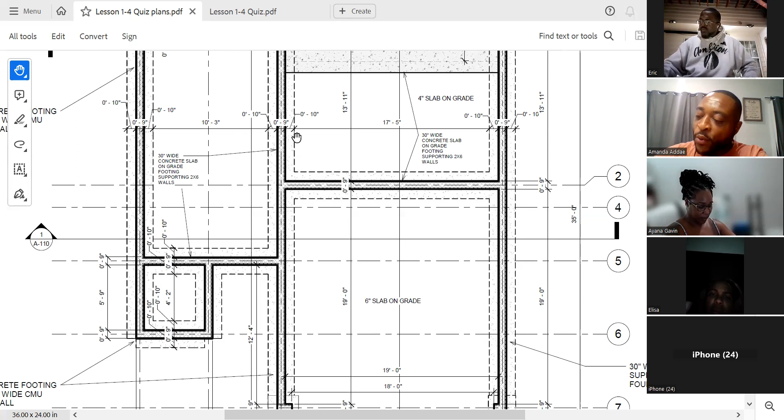Okay, but that wasn't the final question. Our final questions really were going to be, how many yards do we need for the slab only? And then how many truckloads will we need to bring us the concrete for the footings and the slab? So can we calculate the slab real quick, y'all?

Yeah, I got the basement slab is 638 times what? I got 199 on that. Okay, so we got 638 square feet times 0.333, right? That's 210, what is it, 210. 210 divided by what, 27?

Yeah, and then I got how many yards is that? Well, I just added them together. Hold on, got 49.5 added together. And then you said times 27. I don't know if that's right, this is the final countdown.

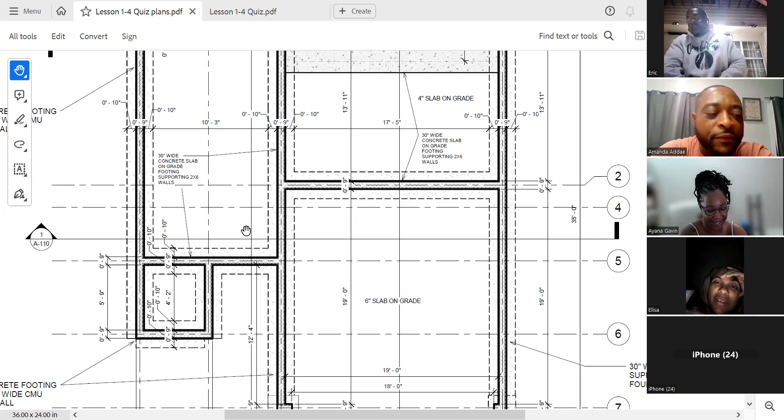Good job, Elisa, you didn't fall asleep on us. I thought you would have by now. No, I didn't fall asleep. I'm still awake for now, but that food kicked in. She's like, it's over with.